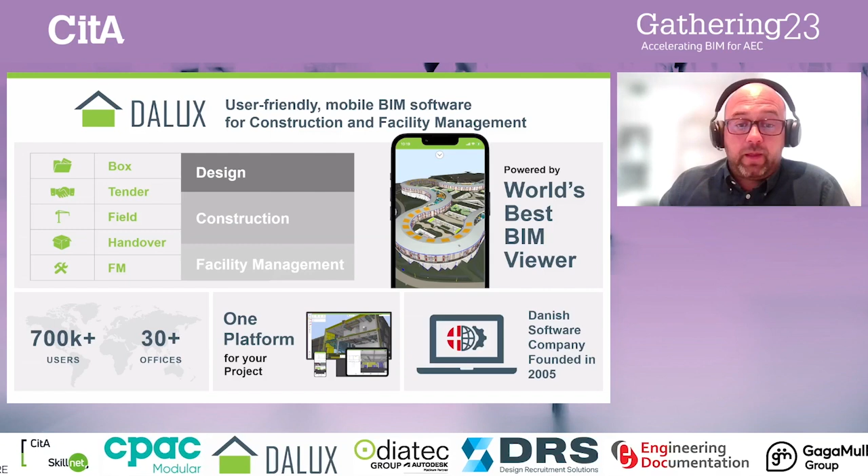Before I begin into the detail of this, I will be showing Dalux here. I am representing Dalux, but the concepts are the important thing - you can do this with other software, it's not an issue, but I'm going to show it through Dalux, as I think you can imagine I should do. So, to move on.

The end of the project is approaching. You're under pressure, you've got completion dates, and then the client starts asking you for handover information. You've got a lot on trying to finish the project. You start to think about it - okay, how do I hand over this project? What data do I need?

Take the electrician as an example - he's on site at the moment fitting out all his light fittings, and you haven't seen any information from him. So you ask him straight up, can I get the information I require regarding handover for all the installed assets? He says they'll send through some stuff via email. That's kind of fine - it's all email and documents, PDFs - but the client is looking for an asset information model. So we have to get this information back into the model. We go back to the consultant, the architect, the engineer, and very much this is not in their scope.

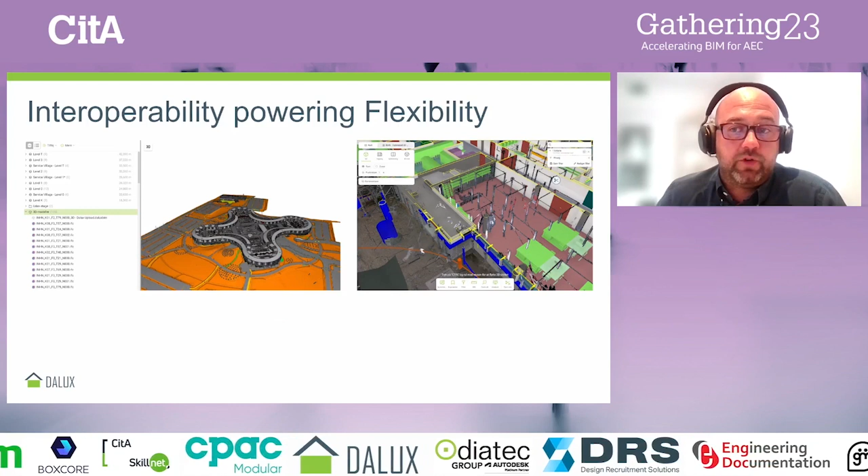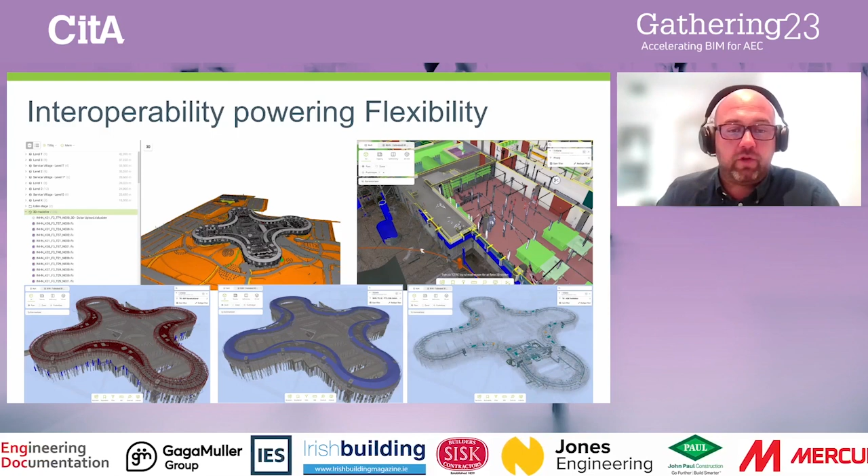And we've seen the federated models, but it's also about the data behind it. You also have other things like, Ronan spoke about photos, 360 videos. They could all operate together for that visual side of it. I know we're not necessarily talking immediately about the data, but bringing all that together is a really important part of this, making everyone access even the visual side of everything.

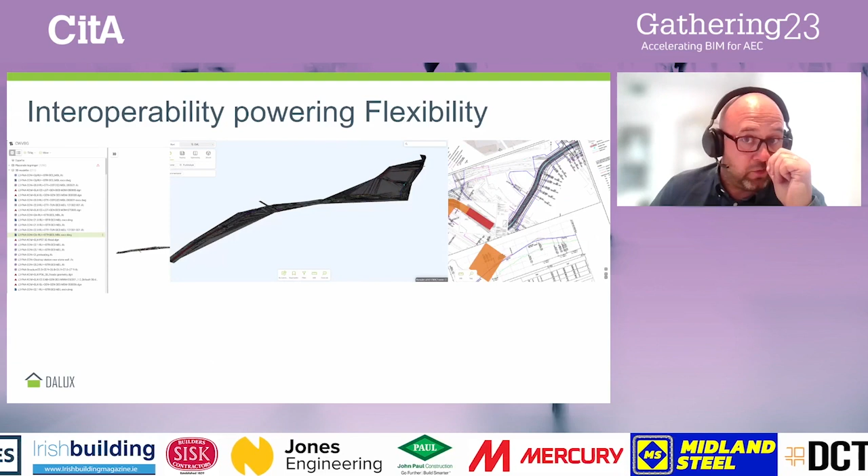Take this model, for example. It doesn't look very big, but that's actually 215 models. It's infrastructure. Like the amount of detail required in that. You've got drawings of roads, geo surveys. This bridge or underpass here is only one tiny bit of that model.

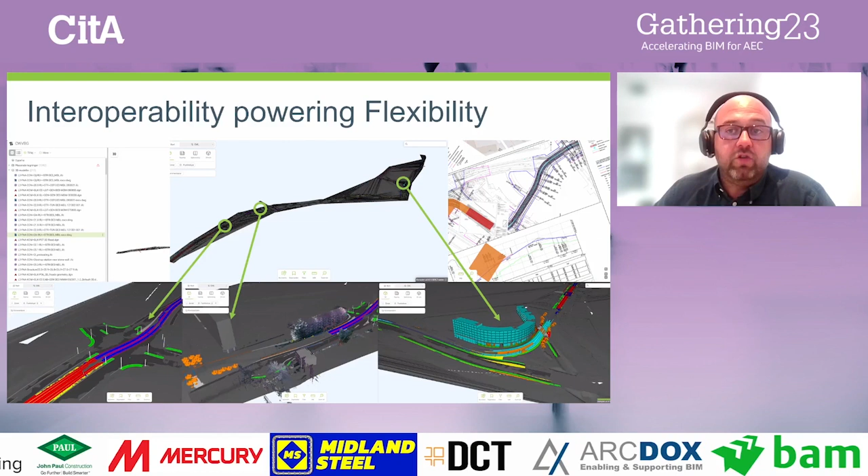This one with a point cloud is only another tiny bit of that model. And this is a whole building, which in a lot of cases is a whole project, but it's only a tiny part of that model. There are huge amounts of different systems for that flexibility.

So we've already mentioned about the need for flexibility, but to reiterate, this is because there's a network of people needed to work on a project. Each one has different information they have to provide based on requirements set above. And by allowing flexibility, you can then start to have collaboration between different parties, starting to get those on the project to understand what it is being constructed, as well as the information required.

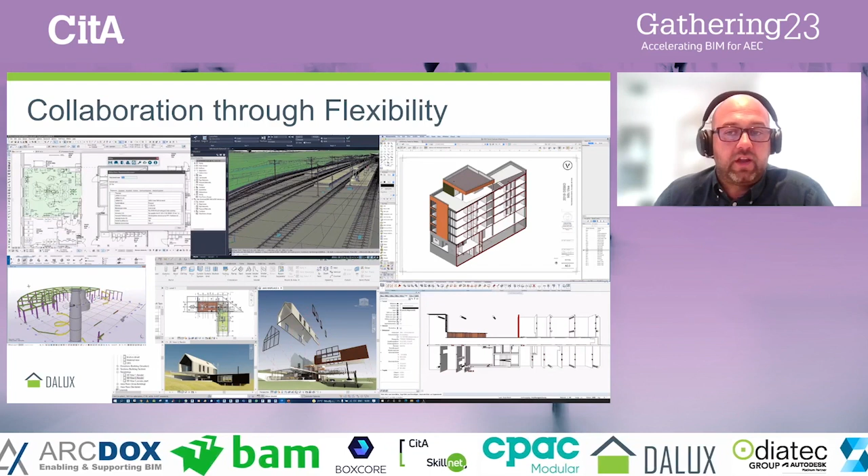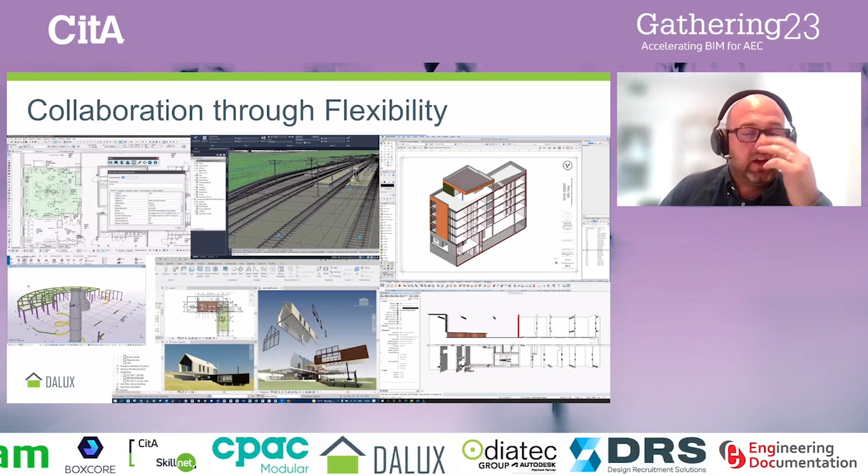You've got these are the various systems you could have. You've Revit, Civil 3D, ArchiCAD, Tekla, Vectorworks, Allplan, even more could be used on a single project. And collaboration can only happen with interoperable formats that enable this flexibility of system choice. You can't tell people what they have to use. They need to work in what they're comfortable working with.

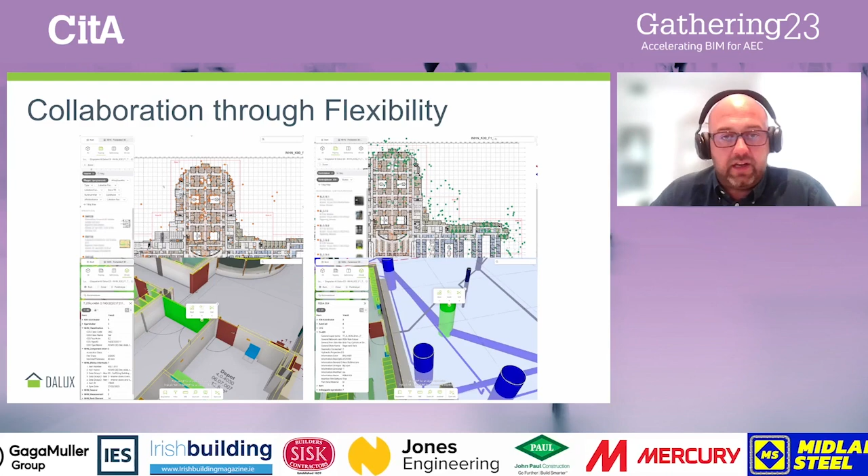You can now drill down into the one contractor, one phase, whatever it is. But the system has to be user-friendly. People have to be able to get into it. They have to be able to fly around it. They have to use it easily. It can't be heavy. You shouldn't need a gaming laptop to do this. You should be able to access it easily, ideally on mobile devices, but at least on a standard laptop.

You've got just more information here. You've got access to, as I said, there were 215 models here, but I can drill down to this bit of bridge, get the data behind it, whether it's IFC data, whatever structural data there is. That's the kind of information you need to be able to get to.

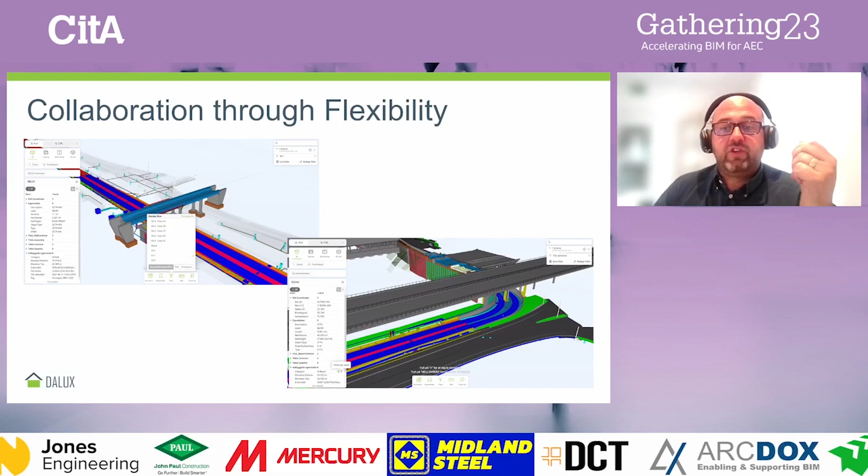So, reliability through collaboration. Now we have people talking. The final bit is to get the requirements. They've got to be communicated and fulfilled properly. Through collaboration and understanding, people can begin to do reliable information exchanges between each other. If they're not communicating properly, we don't get great information. If they're communicating well and they understand what they need, we get good outputs. So this is what we need to achieve.

So how do we achieve this? Unfortunately, some of it starts with paperwork and written documentation, contractual obligations. It's complicated stuff, but it's needed. EIRs, OIRs, PIRs, AIRs, you've heard it all before. It's unfortunate, but that just has to be there. People have to know what they've got to do. And it's important that this is contractual. It's never easy, but if you make it at least easy to read, accessible to them, that's at least a good step along the way.

So this stuff looks like this. It's tables, documents, matrices. It's information provided in Excel, PDF, emails, spreadsheets, COBie spreadsheets. But the really important thing is who has to supply it, this information, when do you need the information, and what information is required. That's the critical bit. And that's what people have to get. A contractor could be on 10 projects, there are loads of different requirements, but that's the core of it to get back to.

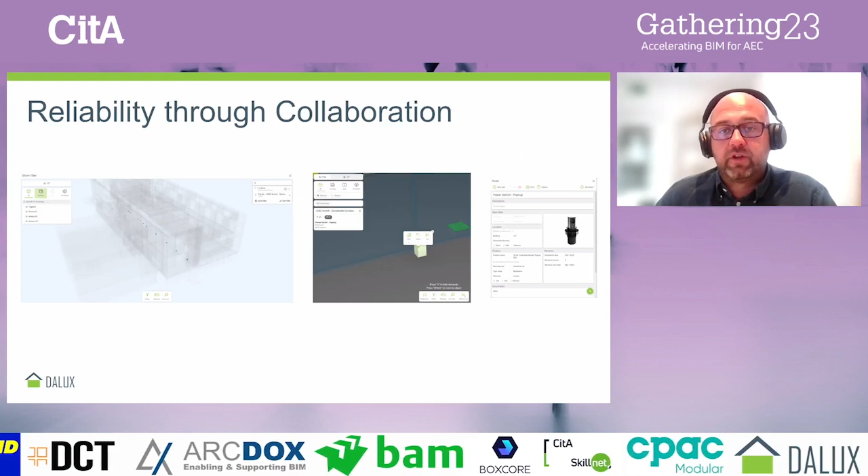It's a pop-up socket. There'll be loads of them on a project. So you only have to put the information in against it once, but you save the family, put that information in against them once. It's not that big a deal.

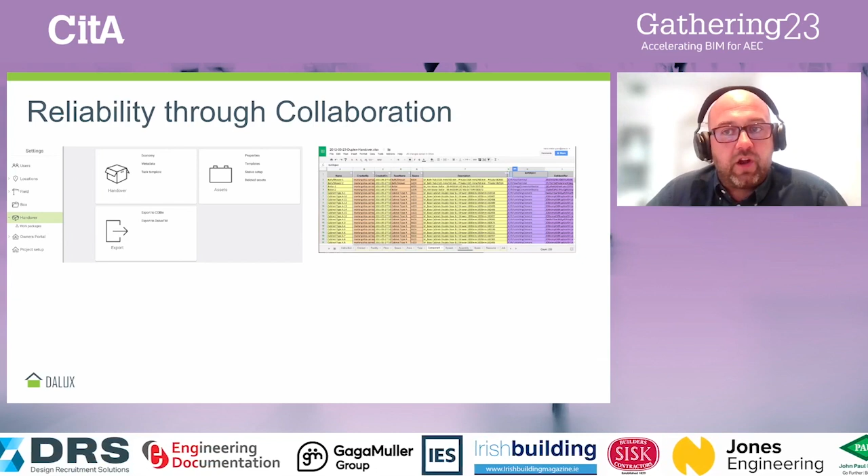And then that information needs to be exported, so you've got that good head of information, and you've got to get it out. You can either do it through COBie or you can push it into an FM system. Dalux here—of course we have the FM system for it—but it takes all the data across and allows the client to manage it properly. They can see if they have multiple assets, multiple buildings. They go to the map, click in, click down. They can drill down into information really, really quickly, very, very easily.

So remember, we're getting to the end now, but show people what they need to do, when they need to do it, and in a way they can understand. It's kind of, keep it simple, stupid—that's the way of it. It needs to be brought down to that. We can't expect contractors who need to be on site all the time, who are trying to make money, trying to get through it, to be sitting reading 100-page specifications. We need to give it up front and say, there it is in the model. All the stuff is saved. Just click your filter and you can see exactly how much information you have to fill in. And that's the only fair way to do it.

So the delivery phase to management phase—it's as difficult as you choose to make it. If the consultants and the main contractor put that bit of effort into getting that simple model, so they can have some asset data in there attached to the electrical or mechanical, HVAC, whatever it is contractor, that they can filter it and see exactly what they need to do, then we'll get much better outcomes. That's really it about that—I've got a couple more slides.